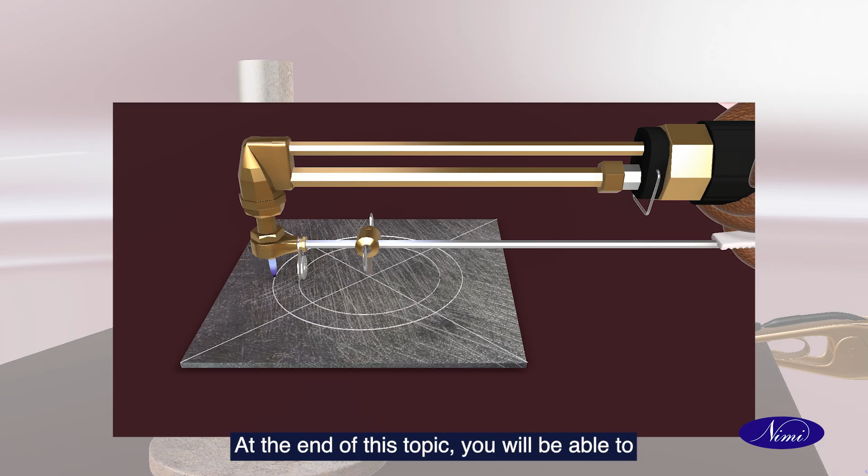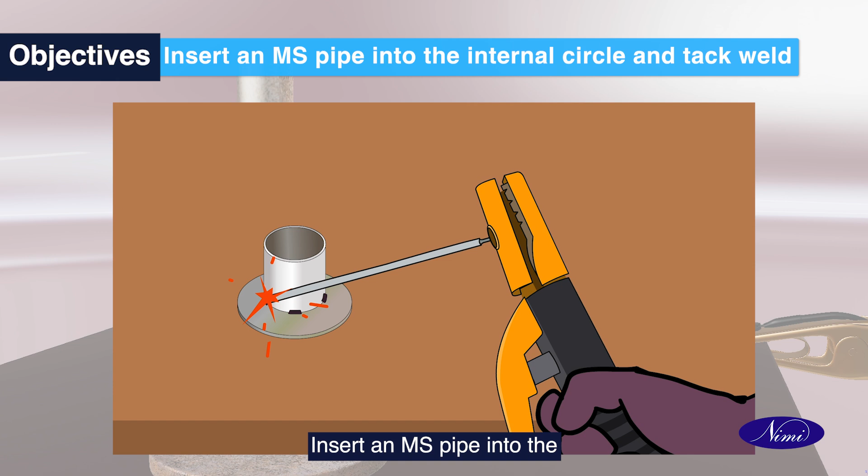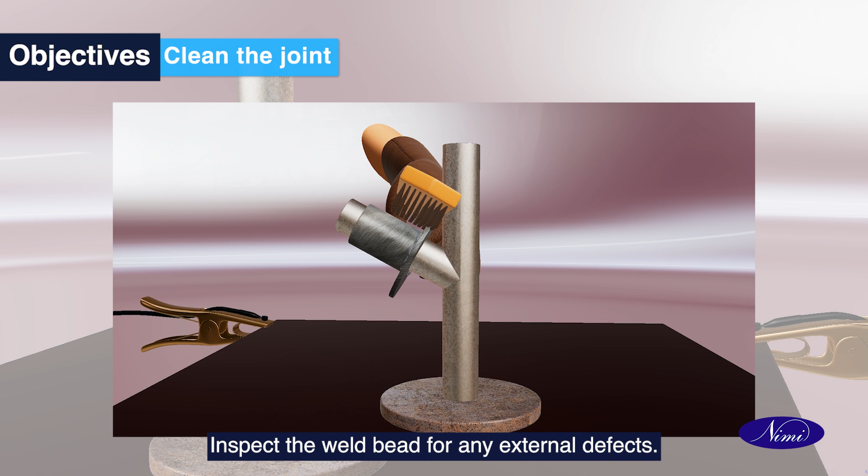Objectives: At the end of this topic, you will be able to mark both internal and external circles on a square plate and cut them using gas cutting. Insert an MS pipe into the internal circle and tack weld it. Weld the pipe to the flange using the arc welding process in the 1F position, rolling. Clean the joint using a steel wire brush. Inspect the weld bead for any external defects.

Here is a list of the tools required for the pipe flange joint on an MS plate with an MS pipe of 50 mm by 3 mm wall thickness, 1F using the shielded metal arc welding process.

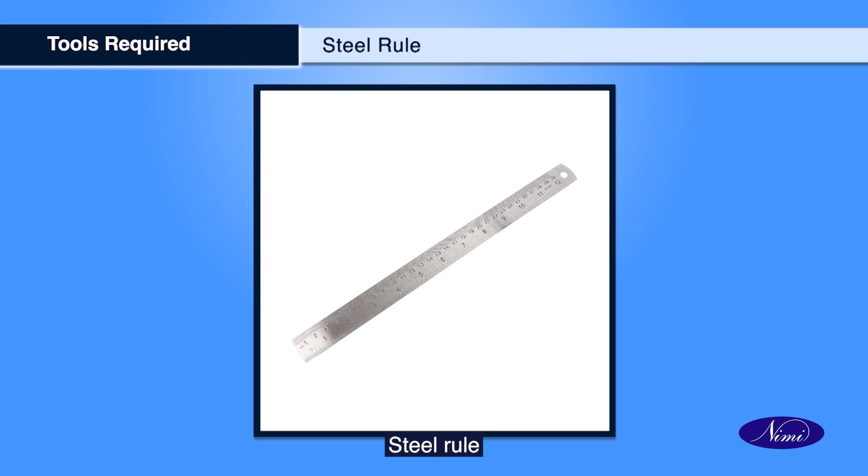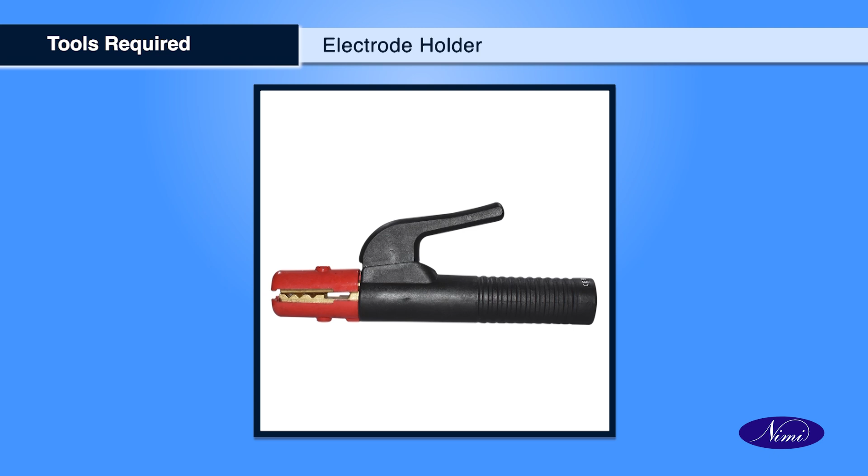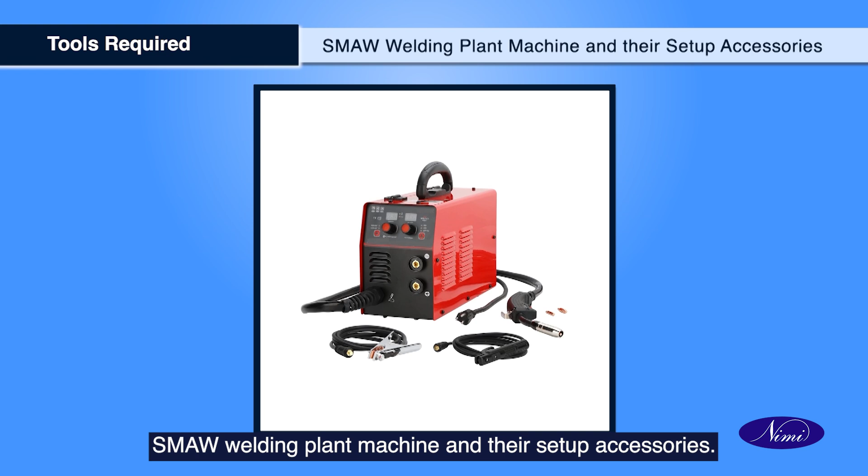Steel rule, scriber, prick punch, ball peen hammer, flat file, bench vise, tri-square, tongs, chipping hammer, steel wire brush, electrode cable and earth cable, electrode holder, electrode, personal protective equipment, SMAW welding plant machine and their setup accessories, C-clamp.

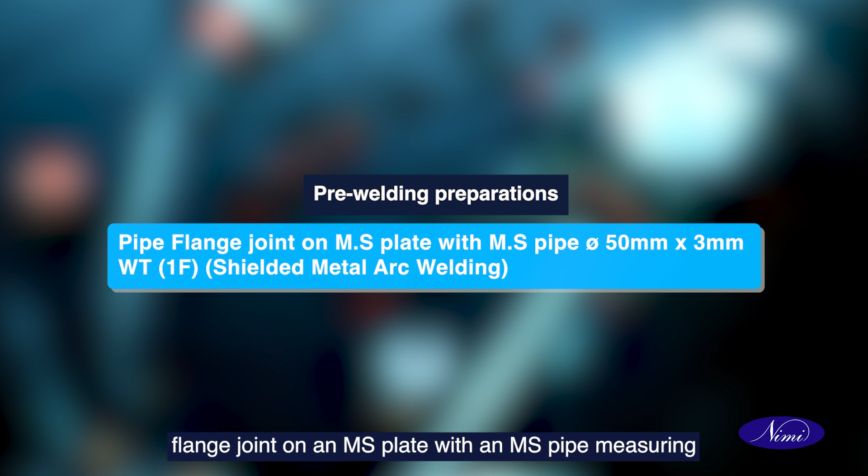Now let's examine the pre-welding preparations for a pipe flange joint on an MS plate with an MS pipe measuring 50 mm by 3 mm in wall thickness, 1F.

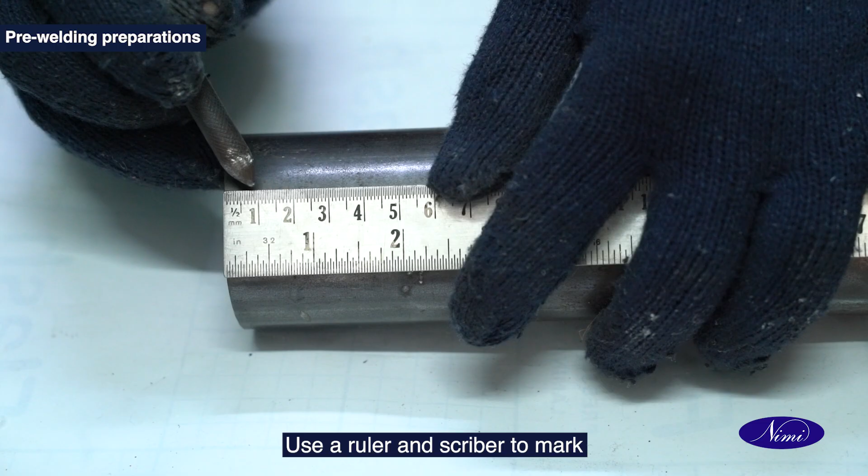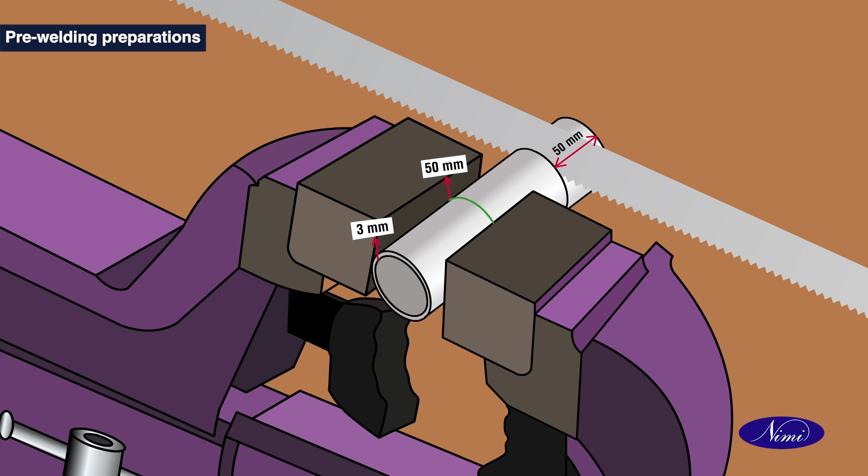Acquire a full-length MS pipe with a 50 mm diameter and 3 mm wall thickness. Use a ruler and scriber to mark a 50 mm length on the MS pipe. Cut the MS pipe using a hacksaw. Deburr the edges with a file and ensure a clean finish.

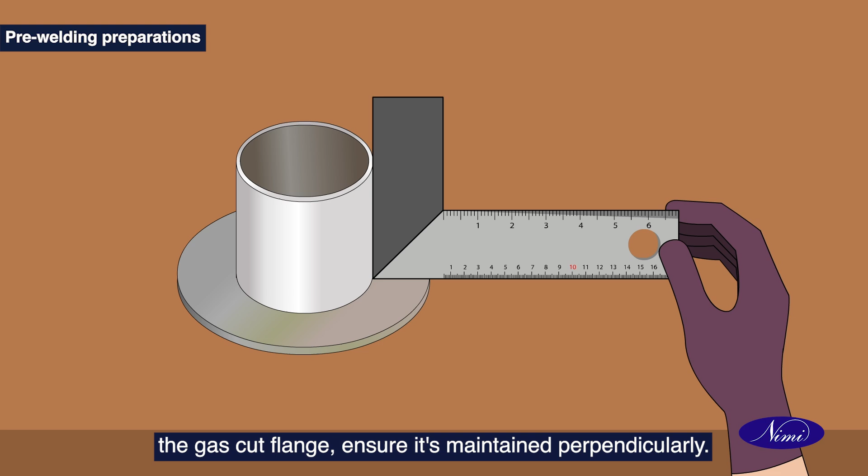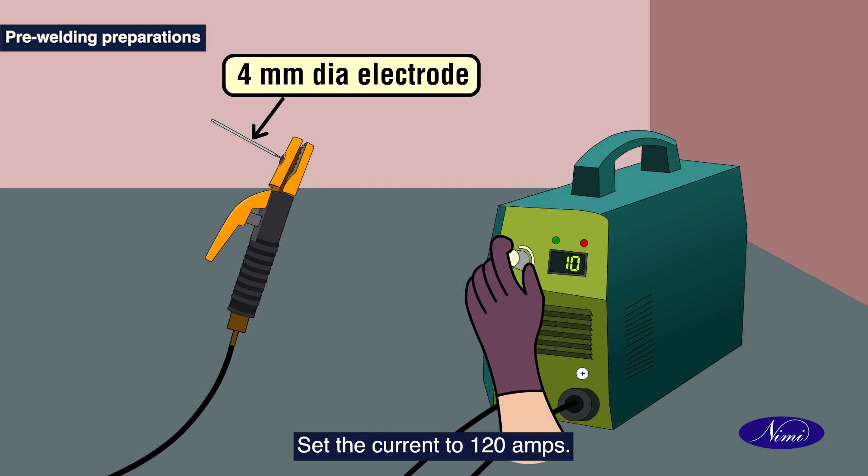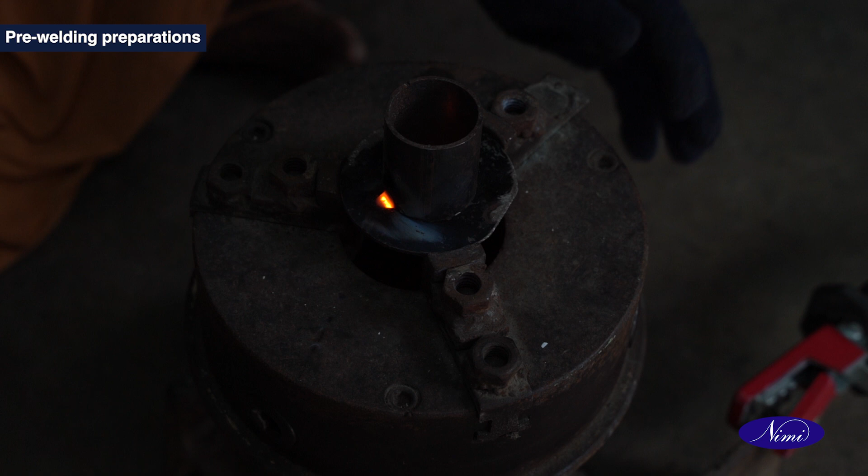When tacking the pipe with the gas cut flange, ensure it's maintained perpendicularly. Use a 4 mm diameter electrode for tacking. Set the current to 120 amps. Perform the tacking at 4 places on the other side of the flange joint. Maintain a fillet size of 3 to 3.5 mm.

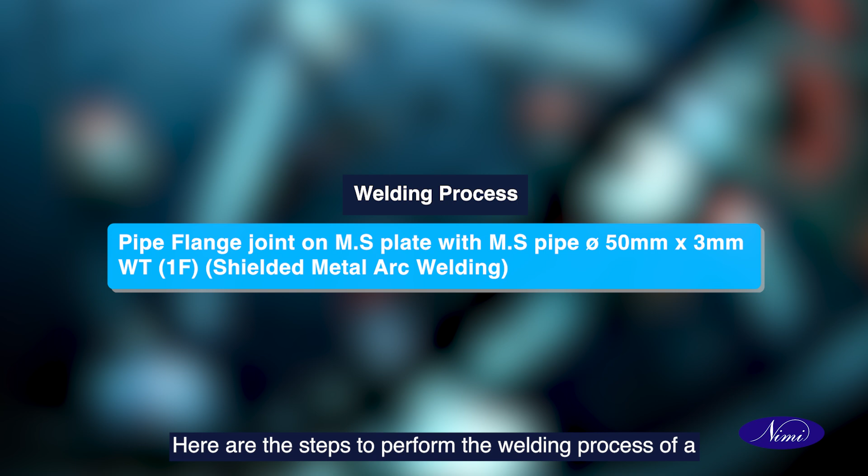Here are the steps to perform the welding process of a pipe flange joint on an MS plate with an MS pipe diameter 50 mm by 3 mm WT, 1F using shielded metal arc welding.

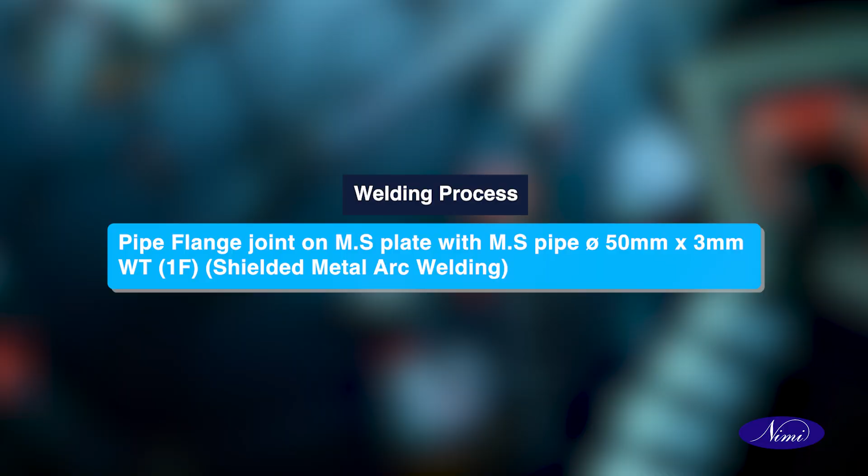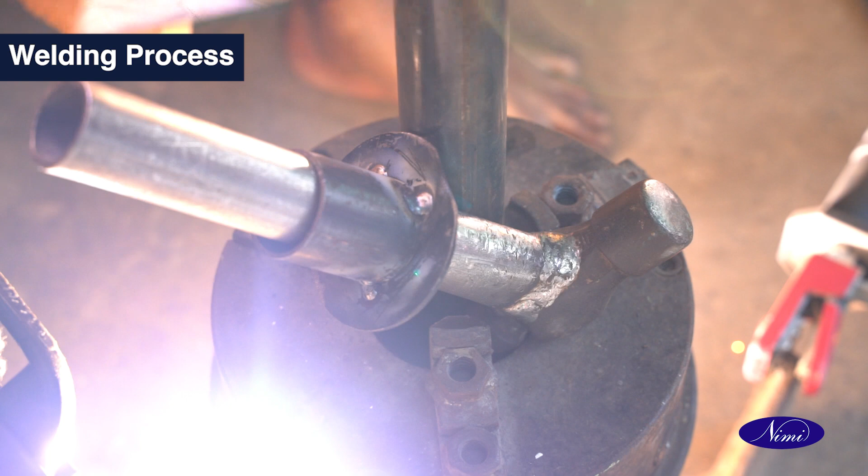To weld the joint in a 1F rolling position, use a weld fixture. Secure the tack welded joint in the welding fixture. Make it convenient to weld in a 1F position and complete the weld in 4 segments: 1, 2, 3 and 4.

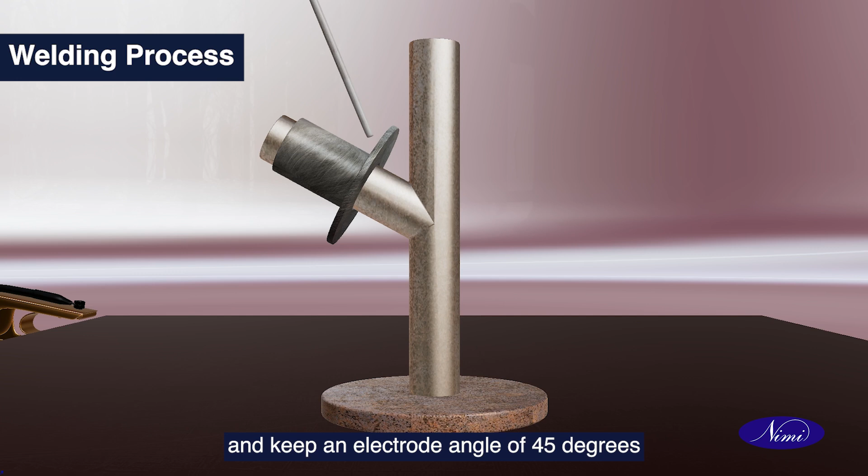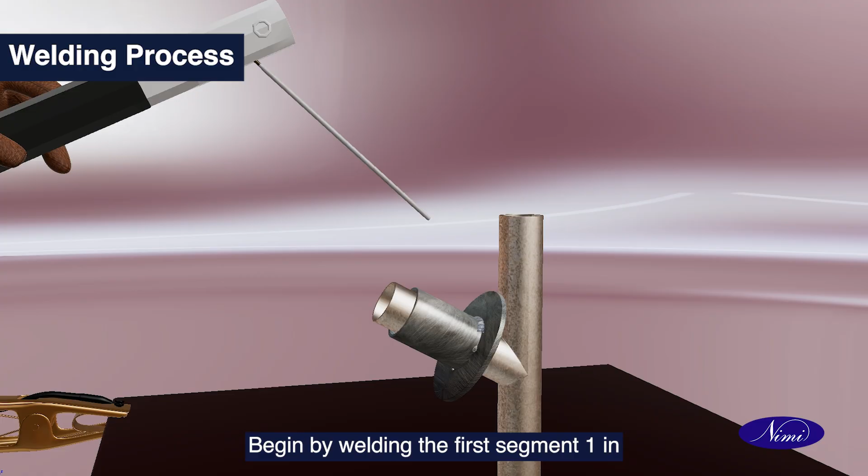Maintain a short arc as close as possible and keep an electrode angle of 45 degrees between the plate and pipe surfaces. Follow the weld sequence to help control distortion. Begin by welding the first segment 1 in the downhand position.

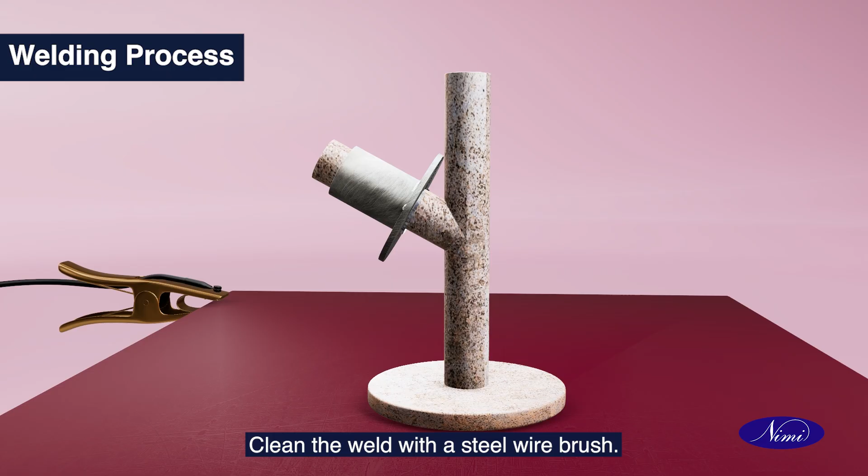Deslag the weld bead with a chipping hammer. Clean the weld with a steel wire brush.

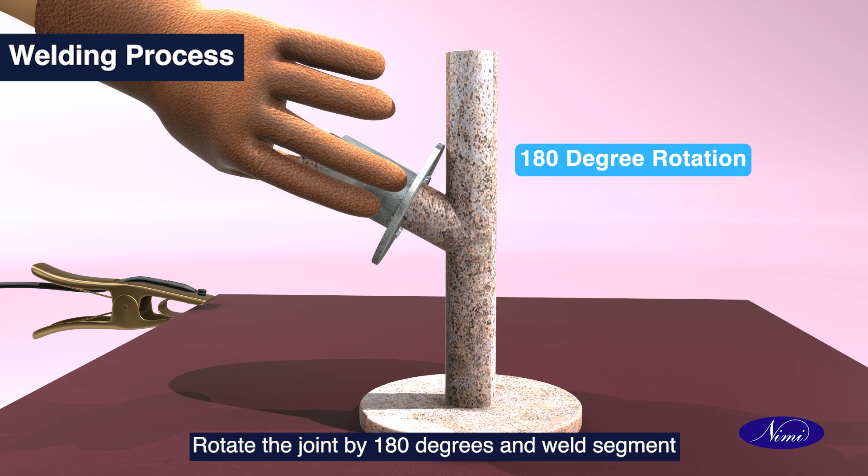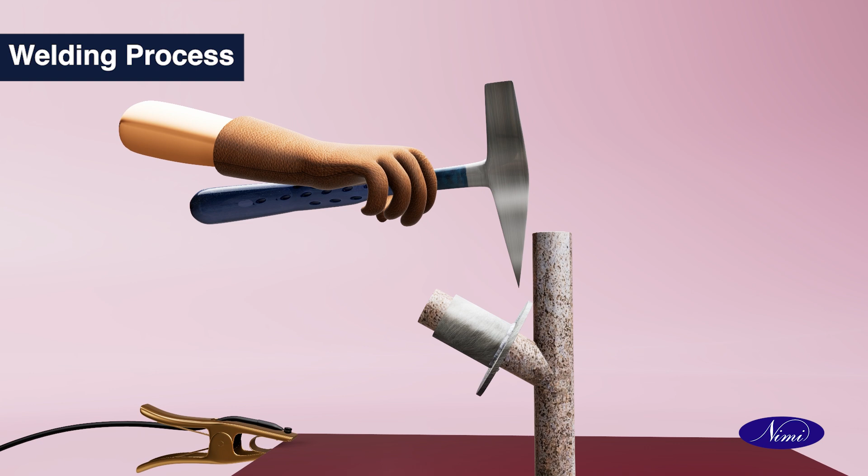Rotate the joint by 180 degrees and weld segment 2 in the downhand position. Deslag the weld bead with a chipping hammer. Clean the weld with a steel wire brush.

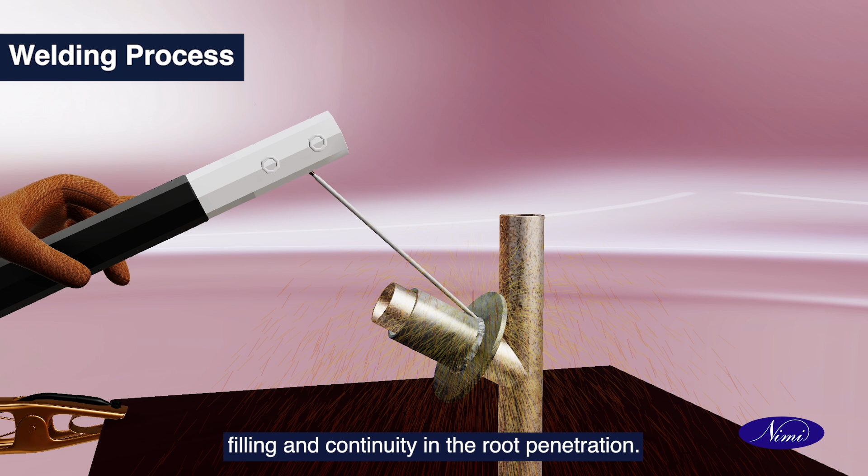Weld segment 3 by rotating the joint on the fixture to bring the segments for welding in the downhand position. The weld deposit should cover about 10 mm of distance over the previous deposit to ensure crater filling and continuity in the root penetration. Deslag the weld bead with a chipping hammer. Clean the weld with a steel wire brush.

Similarly, weld segment 4 by rotating the joint on the fixture to bring the segments for welding in the downhand position. The weld deposit should cover about 10 mm of distance over the previous deposit to ensure crater filling and continuity in the root penetration. Deslag the weld bead with a chipping hammer. Clean the weld with a steel wire brush.

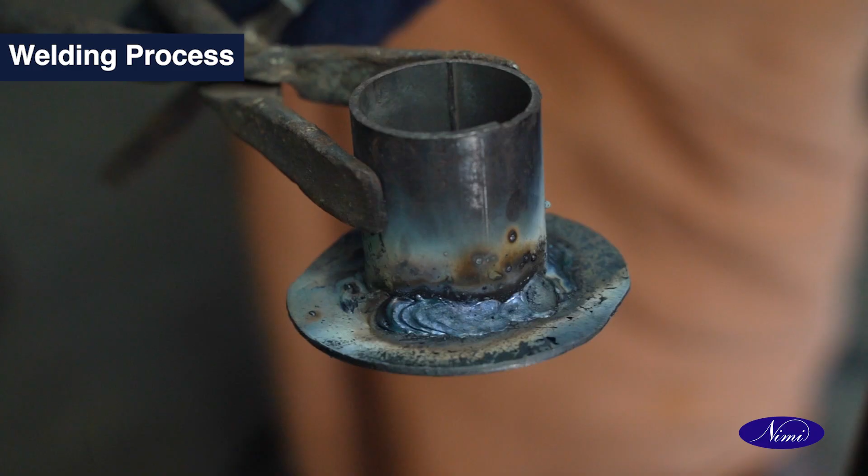Check the fillet size with a weld gauge.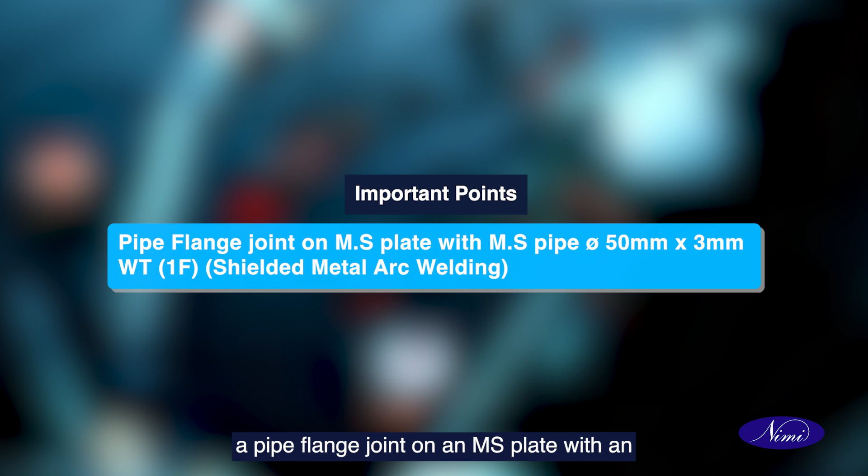Now, we will discuss the important points to follow for a pipe flange joint on an MS plate with an MS pipe of 50 mm diameter and 3 mm wall thickness, 1F using shielded metal arc welding.

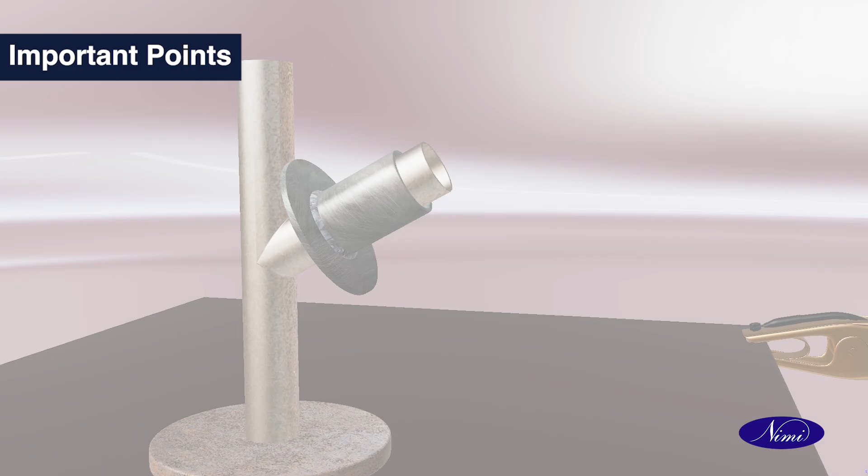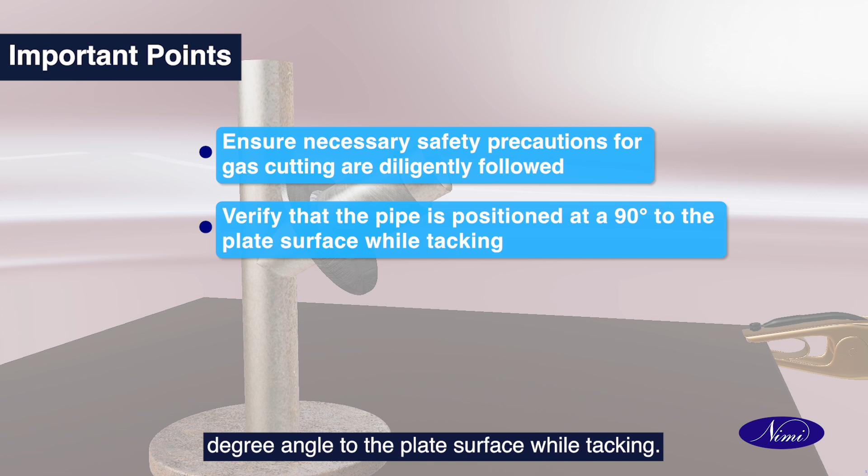Ensure that the necessary safety precautions for gas cutting are diligently followed. Verify that the pipe is positioned at a 90-degree angle to the plate surface while tacking. Ensure proper crater filling at the end of each segment during welding. Implement appropriate safety precautions during arc welding and deslagging.

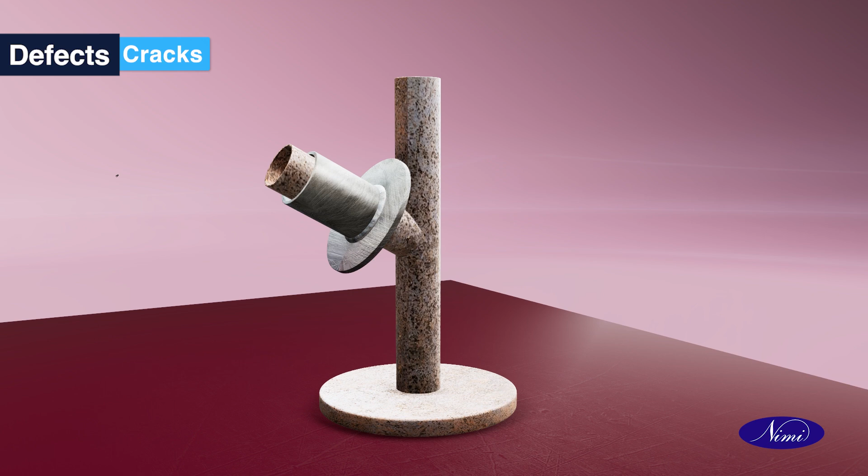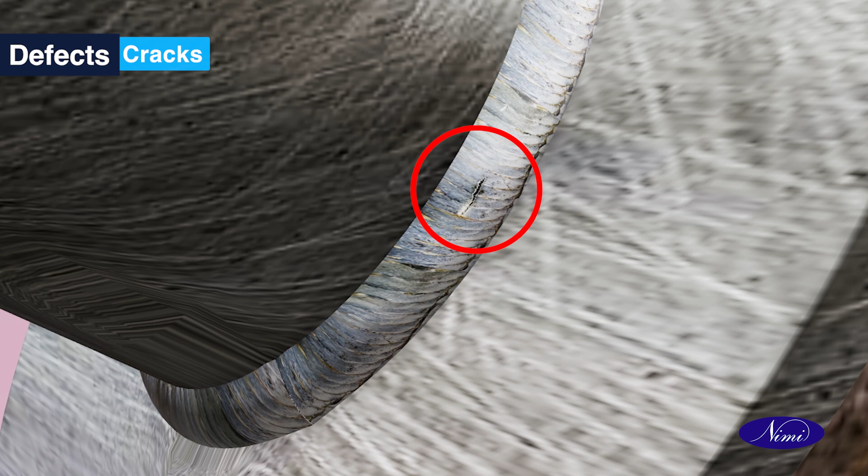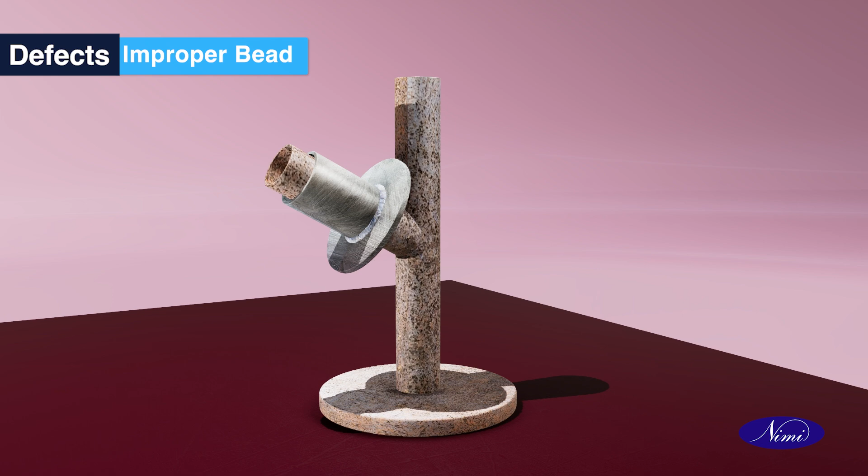Let's also consider the defects that can be identified during the inspection process: cracks, spatters, improper bead, undercut, improper fusion.

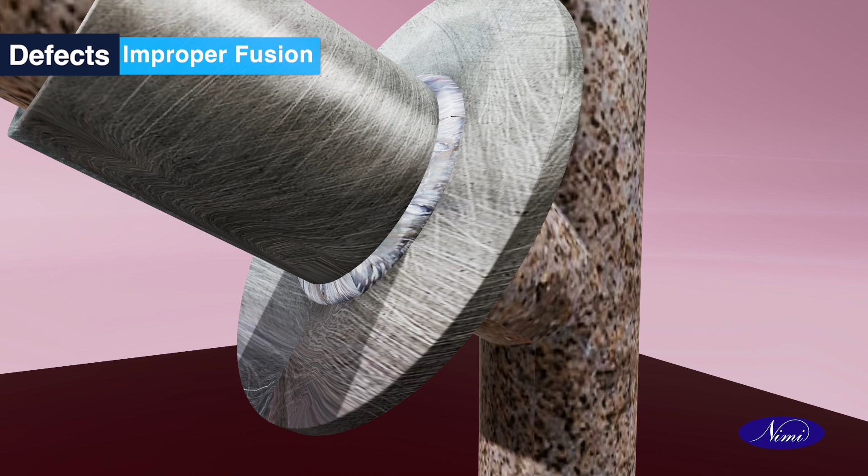Recap. In this topic, you have learned how to mark both internal and external circles on a square plate and cut them using oxyacetylene gas cutting. Insert an MS pipe into the internal circle and tack weld it. Weld the pipe with the flange by arc in the 1F position. Clean the joint with a steel wire brush. Inspect the weld bead for any external defects.